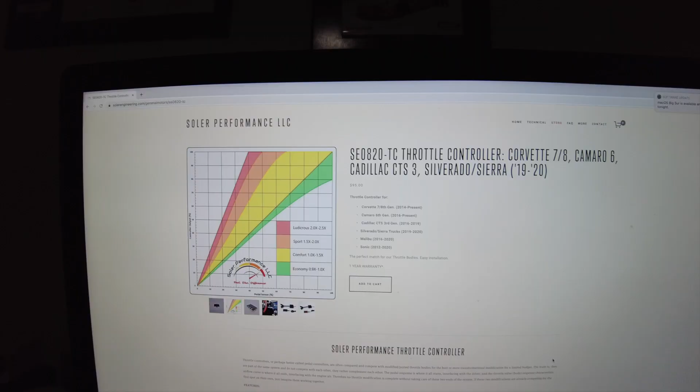Soler Performance's website explains everything really well - remember their website is solerengineering.com. If you scroll down on the throttle controller page, it's got a really nice chart showing exactly how this works. When you put your foot on the pedal, it sends a signal to your computer that looks at a chart similar to this and says, okay, it's giving 50% pedal, we're gonna give the motor 40% throttle. Then the ECU sends that to the throttle body, opening up that butterfly 40%, 50%, whatever it's telling it to.

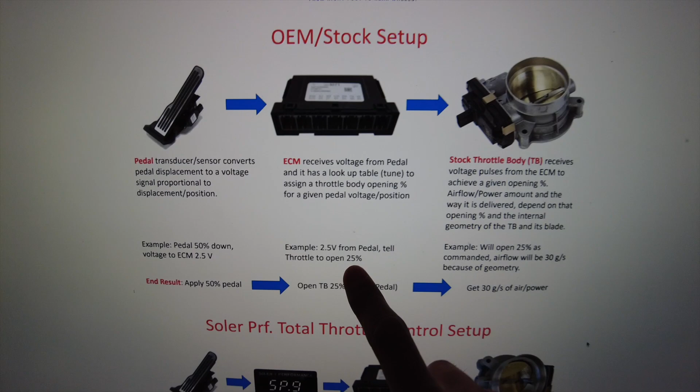What this is basically showing is on OEM, you'll hit the pedal 50% down, but maybe the computer will only think you want 25%. With the throttle controller, it works by sending the signal from the pedal to the throttle controller, which sends it to the ECM, and then the ECM sends it to the throttle body. So you can sit there and fine tune exactly how you want the pedal to move the butterfly on the throttle body.

There's basically 5 different modes: economy mode, OE mode which is basically stock, comfort mode, sport mode, and ludicrous mode. Each mode has 9 settings within itself, so you can really fine tune exactly how you want this thing to react. OE mode only has 1 setting, the others have 9.

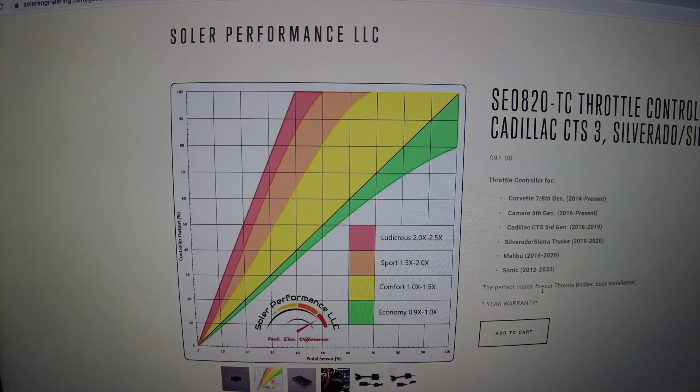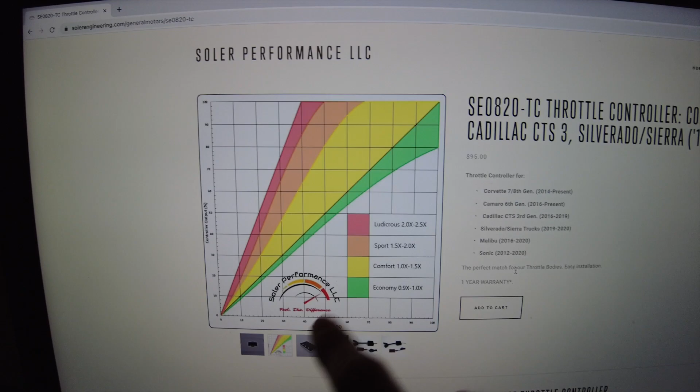This chart right here explains how the butterfly reacts to the pedal sensor. In economy mode, you could be giving it 100% pedal, but the butterfly only opens between 80 to 100% depending on which setting you have. On the other end, ludicrous mode - giving it anywhere between 40 to 50% throttle will basically result in 100% throttle opening on the butterfly.

So if you're gonna be doing throttle body mods, you want to do both - the throttle body and the throttle body controller. The throttle body gives you that extra power and extra airflow, while the throttle body controller lets you fine tune that gas pedal to react exactly how you want it to.

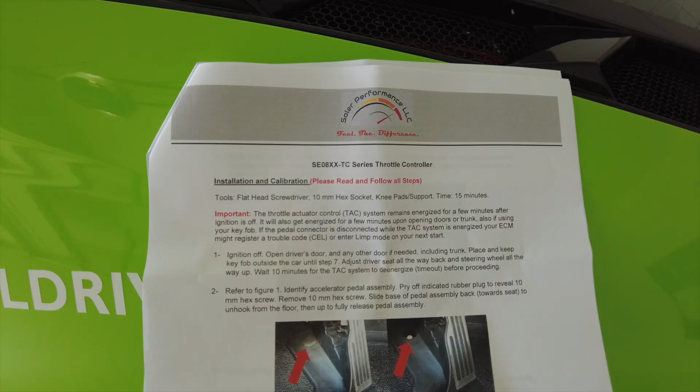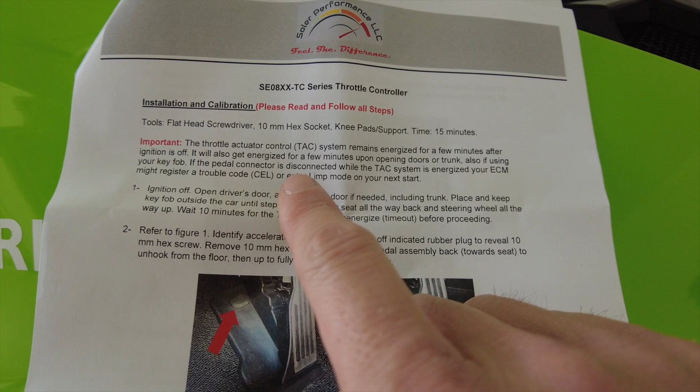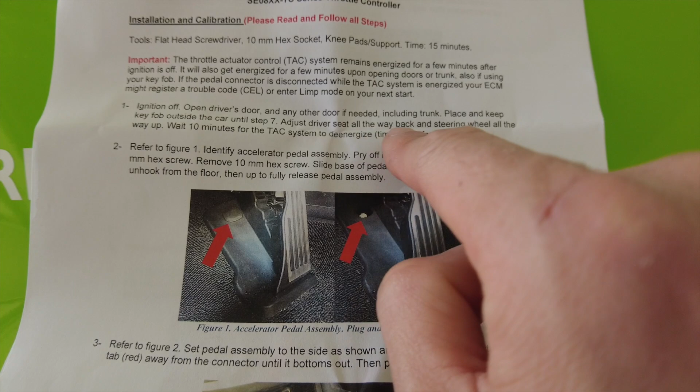According to the instructions, we got to be a little careful. The throttle actuator control system remains energized for a few minutes after ignition is off, and it'll also get energized upon opening doors or the trunk. If the pedal connector is disconnected while the system is energized, the ECM might register a trouble code or enter limp mode on the next start. We don't want that. So first, get your ignition off, open the driver's door and any other doors if needed, including the trunk. Place and keep the key fob outside the car until step 7. Adjust the driver's seat all the way back and steering wheel all the way up. Wait 10 minutes for the system to de-energize.

I'm surprised we don't have to disconnect the battery, but I've got our trunk open, the driver's side door open, the seat pushed all the way back, and the steering wheel up. We'll give it 10 minutes and come back.

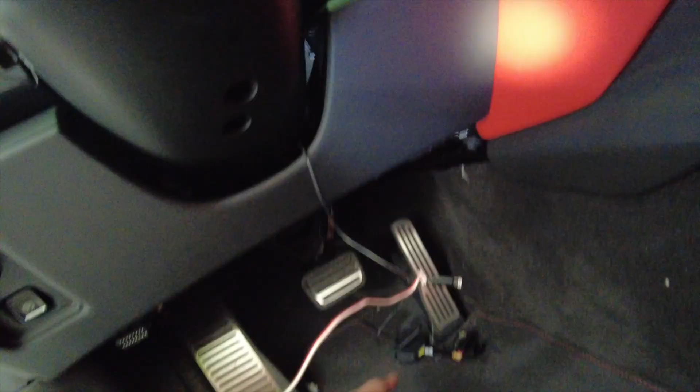So what I've done here is run some wire through the steering column underneath it, and tied it to the end there, so I'm gonna just pull this through like so. Now we got our wire, and we'll run that up through there, and get this thing wired into the pedal. The back of the display has double-sided tape, so you just take that off—I already cleaned the surface right here—so we're just gonna route this wire up, find a good spot, and commit. I'm gonna put it more to the left side so I can see more of the display.

That looks good. Then we'll run that cord through the back there so you can't even see it—just where it's plugged in, you can see right there. Here's a little close up. That's where I've got it, that's where it's staying—kind of concealed, kind of out of the way. It's not gonna ruin any of the interior pieces.

All right guys, sorry it's a little dark down here, but down here by the throttle pedal you'll see a rubber grommet right there. You need to pop that off—use a straight edge screwdriver here, pop that off. It's gonna reveal a 10mm bolt. We're gonna go ahead and take that bad boy out.

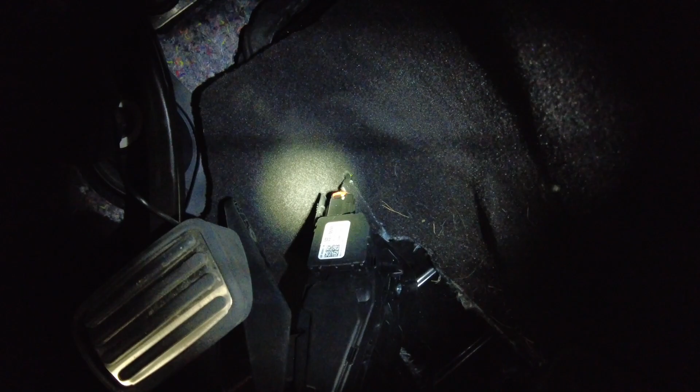All right, once we got the bolt out, the instructions say just to slide the pedal down and up, and then you can turn it sideways like that to reveal the connector at the top. There isn't a lot of play with the pedal—it's pretty much going to stay there because that wiring harness only has about 1 inch of slack. Also down here, this is how the pedal connects—it has these little hooks at the bottom. It connects right to the floorboard and then bolts down with that one 10mm bolt.

So that connector right there is where we need to put this in between. Let's go ahead and detach this—you got a safety clip, push it up, should be able to pull this. All right, that came off really easy. Now we'll just go ahead and connect the new module in between there. Pretty self-explanatory, can't really mess this up. That's really easy, not much to it. All right, so now we'll go ahead and get this organized.

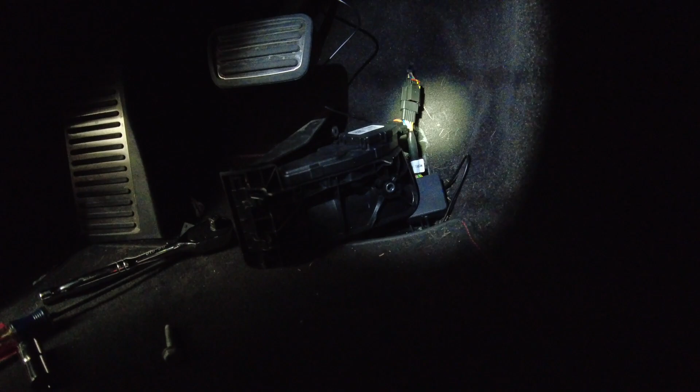All right guys, so unfortunately it's a little tight under here. I couldn't really film while I was doing the install, but I'll show you the final product. We've got the controller sitting right there, with a wire connected to that going down underneath the column here. We've got it coming out right behind the brake pedal, and there was a little eye hole up there that I was able to connect all the zip ties to. The module goes in between the connector on the throttle pedal. I've got it suspended right there, holding up pretty tight so that box won't fall in between the pedal and the stopper. All in all, it's a really clean look. Nothing's gonna be in the way.

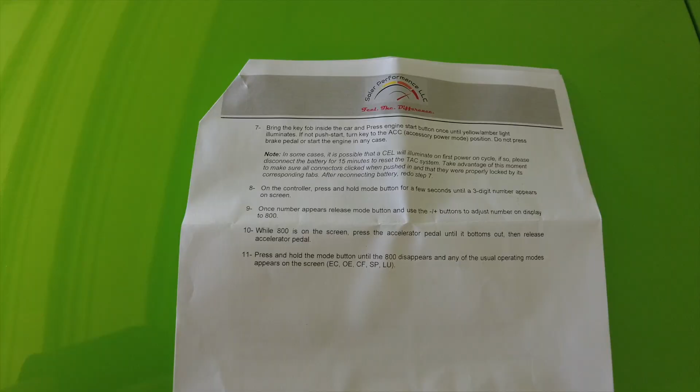All right guys, let's refer back to the instructions one more time. We're gonna bring the key fob inside the car now. We're gonna press the start engine, but we're not gonna start the motor, just get the accessory mode on. In some cases it's possible that the CEL will illuminate. If it does, we're gonna have to disconnect the battery for about 15 minutes so we can reset that TAC system. Here's our keys.

All right, so we got it back in the car. We're not gonna press the brake, just gonna press the start button. Here we go. I got nothing, try it one more time. Here we go, there we go. Amber light is on. This thing says SP6, which I guess is Sport 6. We've got no check engine light.

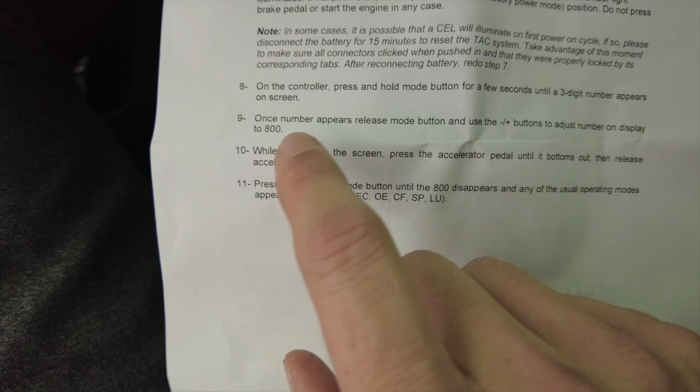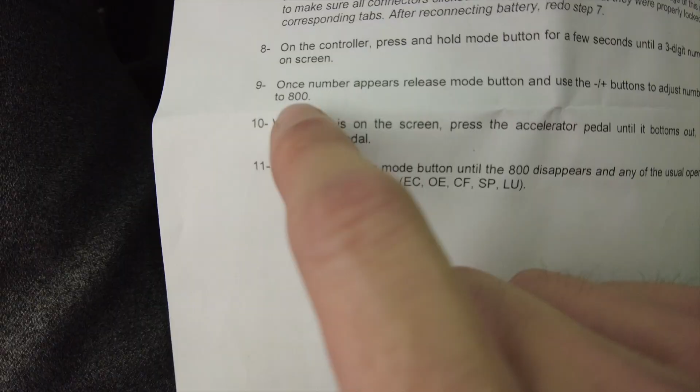All right, so let's see what it says here. Number 8 on the controller: press and hold the mode button for a few seconds until a 3-digit number appears on the screen. So mode button, hold it for a few seconds. All right, 800. Once the number appears, release the mode and use the plus and minus to adjust the number to 800. While 800 is on the screen, press the accelerator pedal until it bottoms out, then release the pedal. Press and hold the mode button until 800 disappears.

All right, so we are at 800. I'm gonna go ahead and smash the gas pedal all the way down. We're gonna let it all the way back up, and then go and hold the mode button again. Holding the mode button until sport mode pops up. All right, so I guess that's it. Well, that was too easy. Let's see what happens, I guess we start it now.

All right, well, we don't have any check engine lights, so we should be good to go. I'm gonna get the beamer out of the way and then we're gonna go for a test drive.

All right guys, so let's go for a test drive. How I have it set up right now, I have it in OE mode, just so I can drive a little bit on original mode, get the feel of it, and then really kind of feel the difference when we go into like economy mode and ludicrous mode. They also say that Sport 5 is like the most linear, so I would assume that's probably where I'm gonna like it the most. I want it to be like, if I put 50% throttle, I want 50% output. If I put 100%, I want 100. So that's probably where I'll stay, but we'll see once I feel it out.

So I've got a pretty good feel about how it is originally. I'm gonna drop her down into eco mode. We're gonna go with eco 1 here. We're gonna see how this feels.

Okay yeah, okay yeah, I can see how it's very, you have to give it a lot more throttle input in order to get to full throttle. It's definitely weird. So I can definitely see if you wanted to save some gas, you can put it in eco mode, and yeah, you could probably save quite a bit of gas.

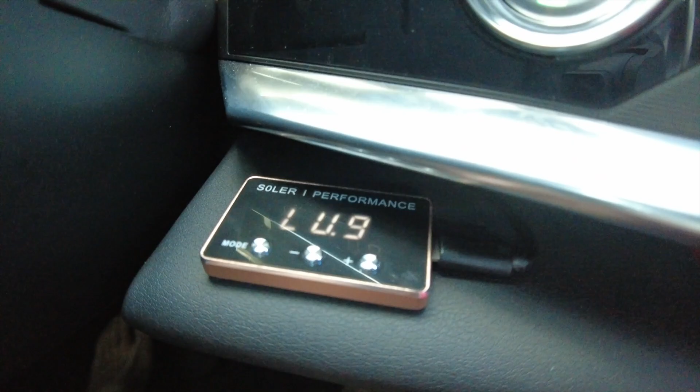All right, so now we're gonna pop her over into ludicrous mode just to see how crazy we can get. We're gonna go ludicrous 9 just so we can see the exact opposite. Oh God, okay. Yeah, so ludicrous mode is like full throttle instantly. Oh God, okay.

Literally giving it maybe a quarter throttle or a third throttle, and it's like full throttle. It's totally weird. Maybe drag racing would be the only application where you'd want it this sensitive. Holy cow, it's like you're barely pressing the gas and it's full throttle. It makes the car feel really fast, but full throttle is still full throttle, you just get there a lot quicker.

All right, so now we're gonna come over here and put it into sport. I want to put it into what they say is the most linear, Sport 5. All right, let's give this a drive and see how it is.

That's nice, that's like 50% is 50%, quarter is a quarter. It still comes on really quick on sport mode. Holy cow, it makes you wonder how numb you were getting before, like you were putting in 50% throttle and only getting like 25%. You really feel a difference for sure. Yeah, 100%, it's a manipulation though.

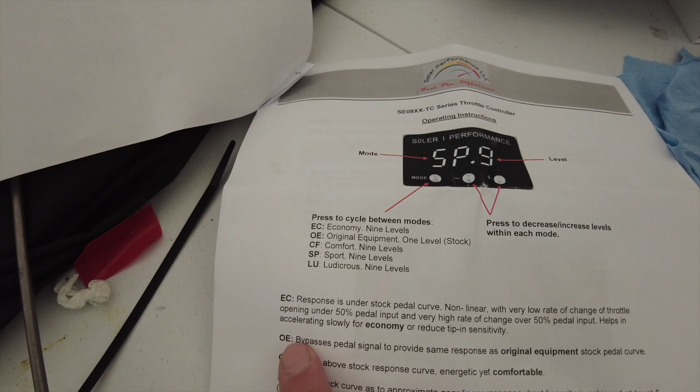Comfort mode is above OEM too, so I gotta test out comfort mode and see how that is. Sport is really fun though, a ton of fun, I could definitely see you using a ton of gas. If you guys are looking for economy, this is gonna help you out too because it'll really help you control that throttle pedal better. Honestly, this is a great application for everybody, people trying to save gas, people trying to go fast. It's great for everyone.